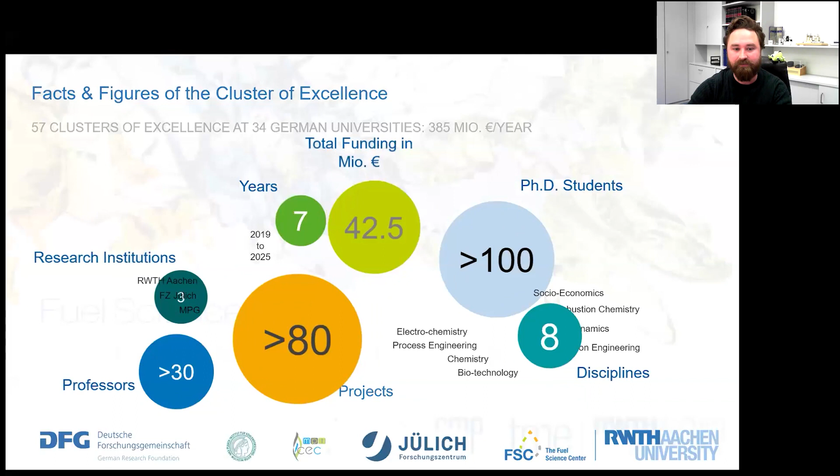With that, I want to show you how fuels based on renewable resources can, or in my opinion, have to contribute to a more sustainable mobility, and finally also to a CO2 neutral mobility with almost zero impact on the environment.

Our research here in Europe, and maybe that's also a little bit the picture for you, what motivates our work here is mostly given by the big social challenges we have in the whole world and the European Union. They defined some targets and some major challenges they want to address, and this is called the European Green Deal.

It should improve the well-being of all people in Europe. One of the biggest topics, of course, for the whole world, is becoming climate neutral in 2050. As I will show you, we think that sustainable fuels based on renewable resources are one important building block to reach that target.

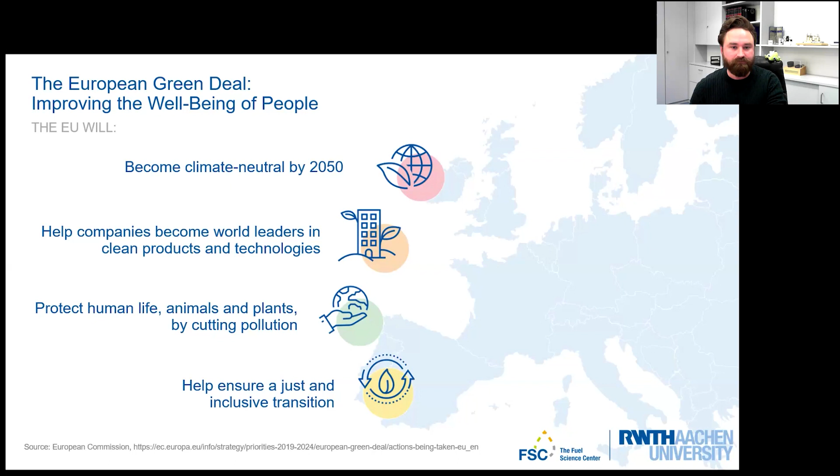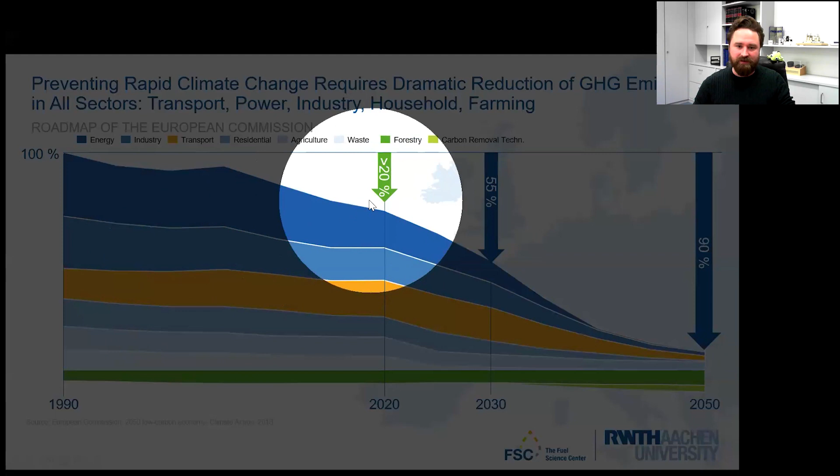If we look at greenhouse gas emissions, which are the driver of global warming and climate change, we see that in the last decades we have a good reduction of greenhouse gas emissions here in Europe. Here you see the CO2 emissions from 1990 to 2020 in Europe. And if you look at 2020, that looks quite good. We achieved the targets, or we overachieved even the targets for 2020.

But then you see that there is still a very massive decrease in greenhouse gas emissions necessary to reach CO2 or greenhouse gas neutrality in 2050. And neutrality means, of course, that we have to be greenhouse gas emission neutral. But that's not possible in all fields by 100%. So the target of the European Union is to reduce emissions by 90% and then have the last 10% compensated for by forestry, carbon capture and storage, and other carbon removal technologies. But still, we have to reduce greenhouse gas emissions by 90% related to 1990.

Currently, we are about a little bit more than 20%. In 2030, there is the intermediate goal of a reduction of 55%. Some sectors are quite on a good pathway. You see the upper bar, the dark blue one, which is the energy sector. They have a big contribution currently to the reduction measures, and also agriculture and waste is quite okay to some extent. But if you look at the orange bar, which is transport, this appears almost even to grow in 2020.

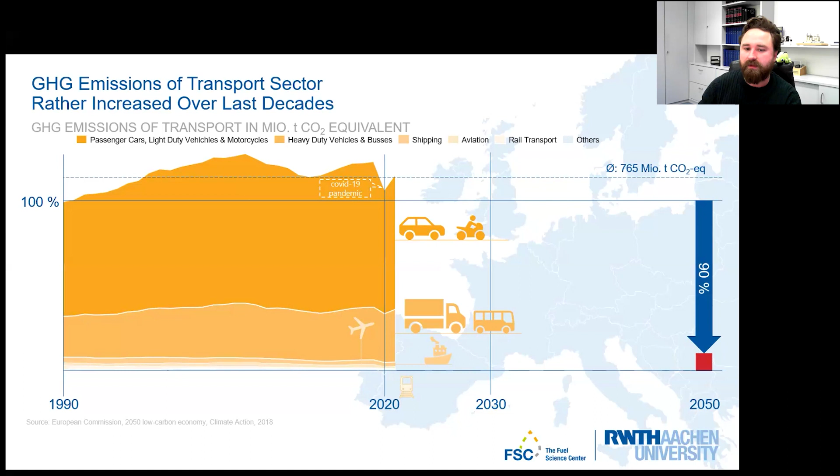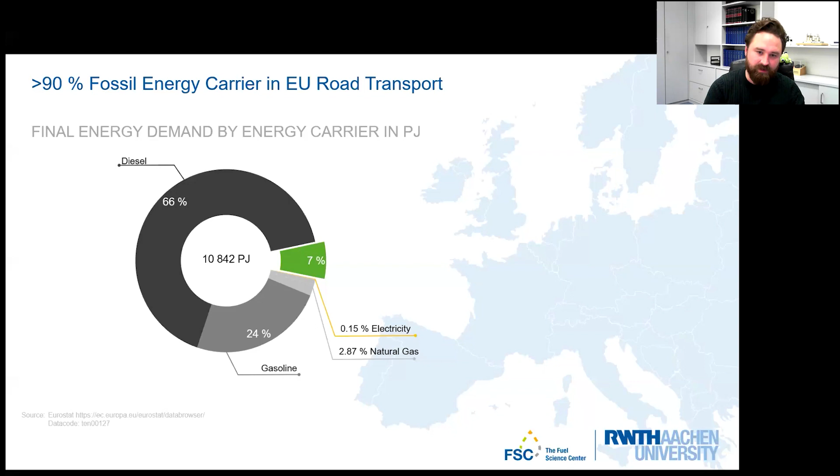But the current status tells a little bit different story. If you look at the energy carrier that I use today, this is more than 90% fossil based. So we have the conventional diesel fuel at 66%, and the conventional gasoline fuel with 1/4. And you see that the renewable share, particularly in transport, is very small, with 7%. And from that 7%, only 1.3% is electricity today. So it's a big way to exchange the whole vehicle fleet to get to 100% electricity share.

The current contribution to renewable energy carriers in transport is biodiesel. In Europe, we have the standard fuel at the gas station for diesel called B7, which means there is 7% biodiesel admixture in every diesel. And we have also up to 10% ethanol in our gasoline fuel here in Europe, called RON 95 E10. You get that at every gas station. Today, this is the only significant contribution for renewable resources in transport at all.

Then the next question is, where does this energy come from? Diesel and gasoline is imported. In Germany, 75% of all primary energy is imported, and more than 90% of the energy for transport is imported energy. And that won't change in the future.

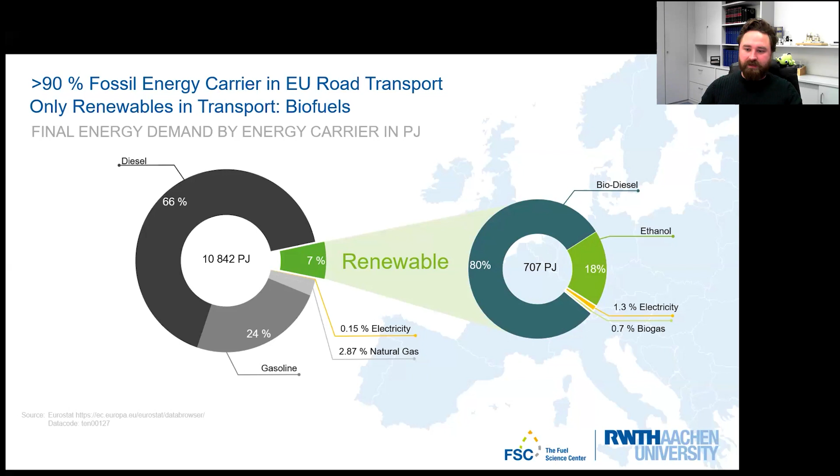So we still have to think about some options, how to, on a global perspective, import renewable energy. I will also show you a few solutions of what we think can be done to import renewable energy, particularly for transport. So in general, we have to get from a very established - if you say it positively - a fossil-based, static, parallel industry to a more adaptive and flexible future.

And this is what our vision here in the Fuel Science Center is: that we have a closed carbon cycle, but not only in terms of greenhouse gas emissions, also other sustainability parameters like pollutant emissions - so health impact, environmental impact - has to be near to zero. So we should have the smallest possible footprint in that.

Further, when it comes to renewable resources, we have way bigger fluctuation. I mean seasonal fluctuations, daily fluctuations with the sun, wind - that is a very fluctuating system. So our conversion systems that convert our resources into energy carriers, or into mobility, or into heat, they have to be adaptive and deal with that flexibility we have in the resources. So that's also part of our vision.

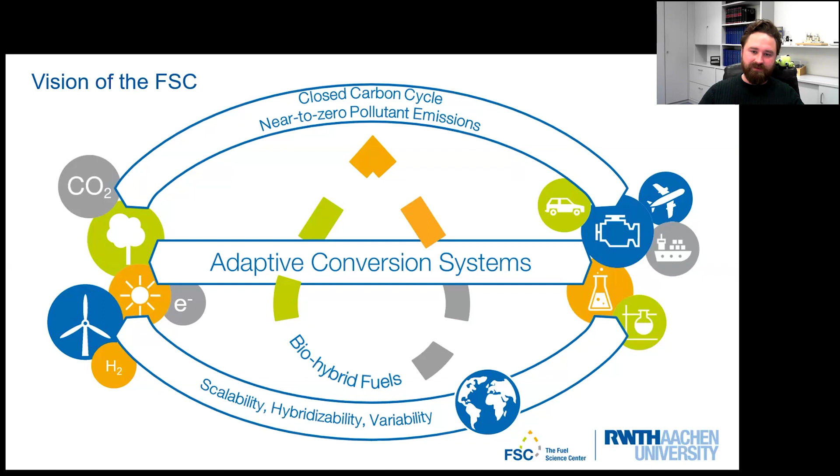What we established over the last almost two decades is called the fuel design process, which means we not only look into the synthesis of fuels, we also look in parallel at the usage of such fuels, and we want to find the overall optimum. So it's not sufficient to only have a very sustainable production - we also need a very sustainable usage of the fuels we are producing.

And to control and realize that, we have also a very important aspect, which is the sustainability analysis. So we have a very complex life cycle assessment around the other researchers, around all the projects, which are basically analyzing every single step in the whole value chain regarding greenhouse gas emissions, toxicity, social acceptance, economics. So a really comprehensive analysis in every step of the fuel processes we have.

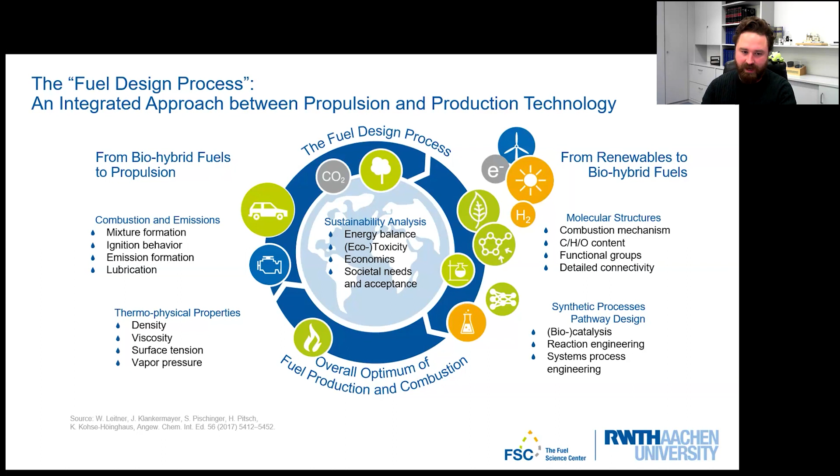And that leads to our structure. So the structure of our cluster really reaches from a molecular level - we have chemists that work really on an atomic level, how to create new molecules - up to the device level. Here we are developing engine concepts, reactor concepts. And then, as I mentioned before, we have a big team working on life cycle assessment to analyze the full system. And this is our very complex system.

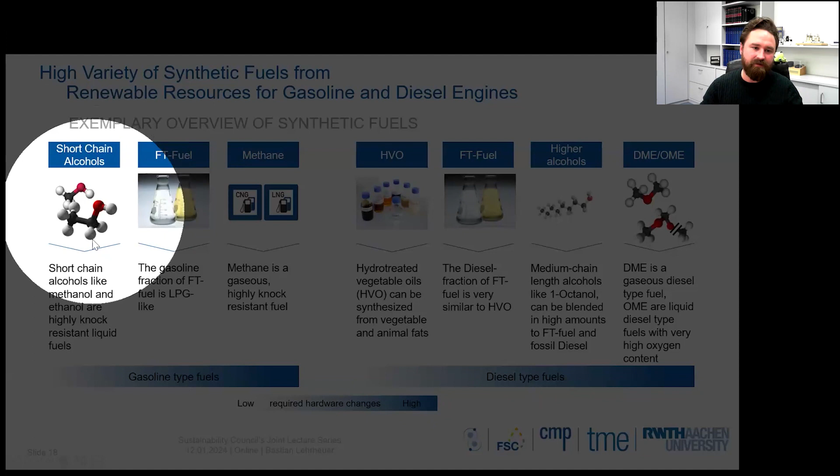For alternative fuels, there is also a whole bunch of different molecules available already. The first way to sort them out is to characterize them as gasoline type fuels or diesel type fuels, and there are multiple available - not only one e-fuel or one biofuel on the market, you can already find a whole bunch of different ones. For gasoline type fuels in general, you have more smaller molecules - short chain alcohols like ethanol and methanol. We also have a bunch of Fischer-Tropsch fuels, which I will show you later. You can also use gaseous fuels in gasoline engines.

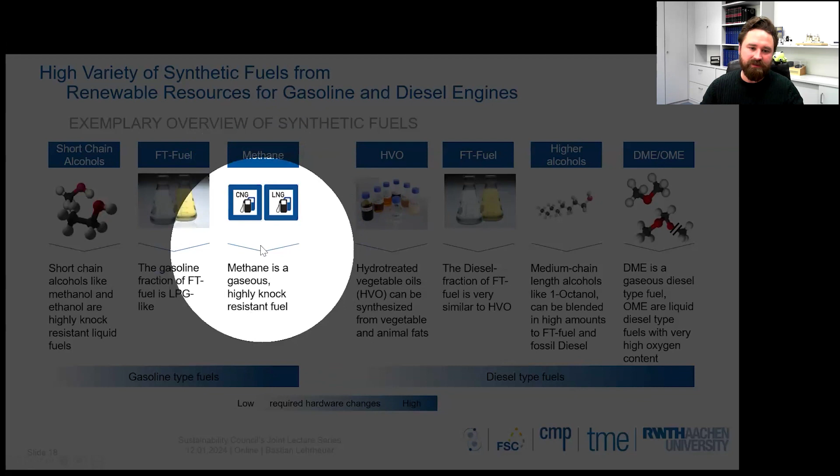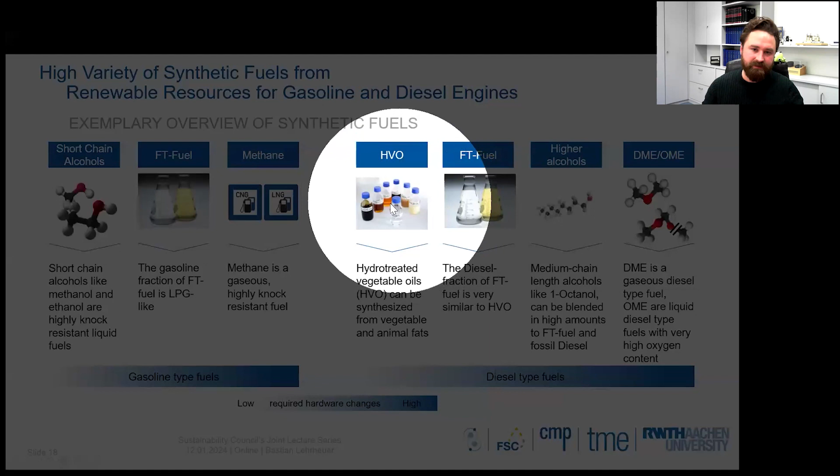On the diesel side, we see examples like HVO, hydrotreated vegetable oil. This can be made from waste - there's a Finnish company already producing a lot of HVO from used cooking oils. Of course you have to be very careful about the sustainability parameters here - is palm oil really sustainable? Are used cooking oils really sustainable? You always have to go all the way down to the base, to the first resource, to evaluate the real sustainability. But if you do that, this is already a very good diesel fuel you can use, and a lot of companies already allow HVO operation in their diesel engines.

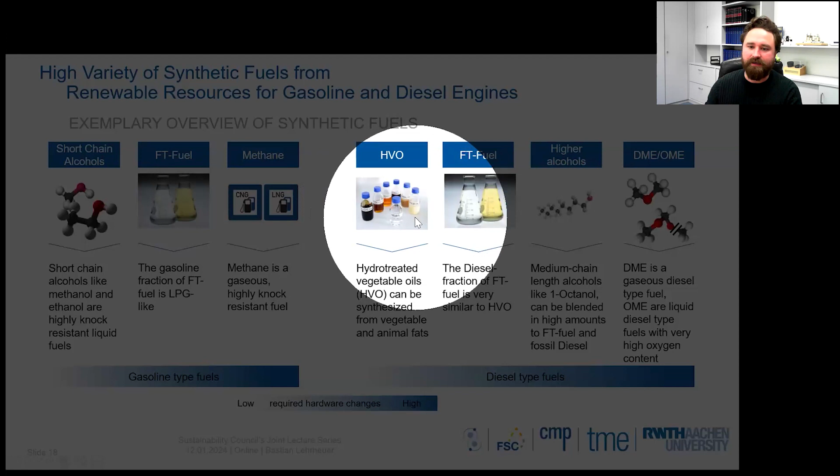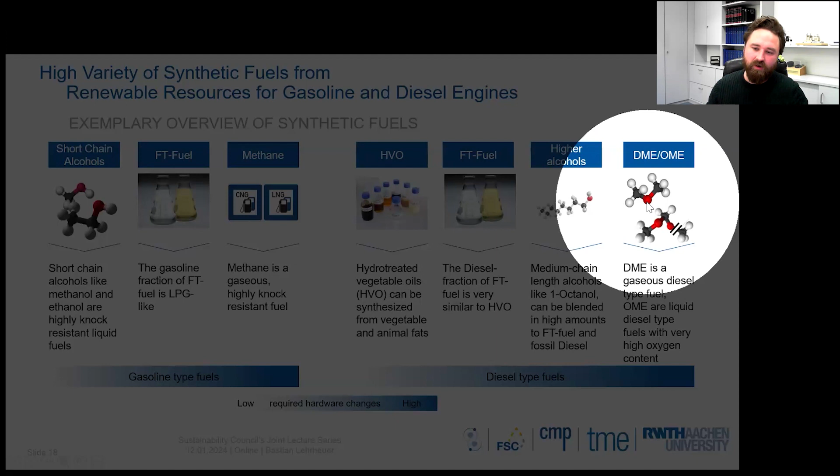Higher alcohols are also one option - I will show you one example later. And DME, this is a more exotic option, but there are already some vehicles out there. In the US, there was a truck fleet running on DME by Volvo. It's gaseous at ambient conditions, so it's a little different in fuel handling, but it's a valuable alternative to diesel fuel.

Also for such renewable fuels, there are a lot of different pathways. Some of them use already established processes - for example, if you have biomass, you can use gasification, and then you already have your synthetic gas. Synthetic gas means it's CO and hydrogen, carbon monoxide and hydrogen. And with synthetic gas you can create, particularly with Fischer-Tropsch, almost any hydrocarbon you want to have.

But for biofuels, the most prominent conversion system would be fermentation. Ethanol is one of the most common ones - Brazil, for example, produces a lot of ethanol from sugarcane. Here again, you have to be very careful if you talk about sustainable fuel and really check where your biomass comes from, not only in terms of greenhouse gas emissions. I heard that in Brazil they burn down the sugarcane fields twice a year, using fire to get rid of snails, insects, and snakes for the workers. That's not really sustainable and environmentally friendly, so you have to be careful there.

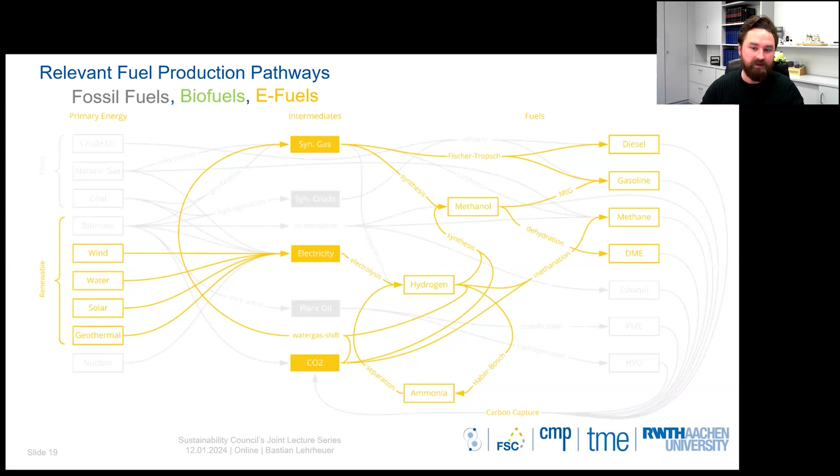Now if I have hydrogen and CO2, I can use water gas shift, which again produces my synthetic gas. And at this point, I'm in my already known processes and can produce almost any fuel I want. But of course, this is not as easy as fossil fuels - with every conversion step you need some energy and you have some losses. A combination of all of them is also possible, which makes the life cycle assessment not easy. You really have to dig into the resources and evaluate the sustainability for each step, for each element in your whole pathway.

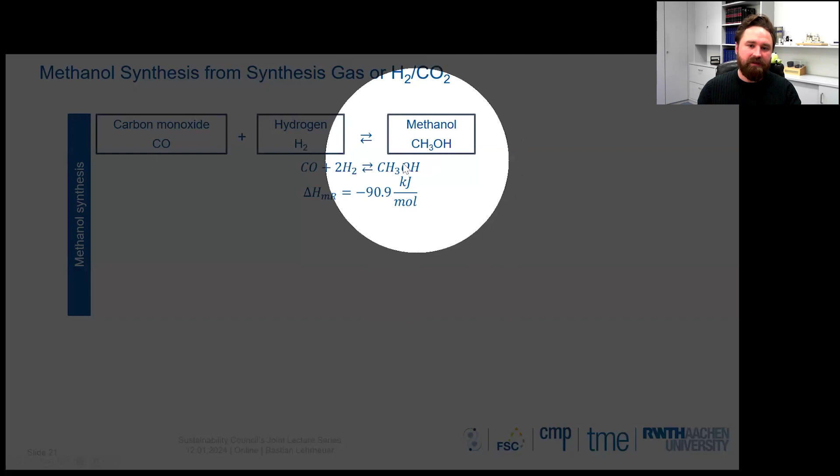One of my favorite fuels is methanol. Methanol is the first liquid fuel you can imagine. It's a one carbon molecule, a C1 molecule, and it's liquid. That makes it very easy to transport. So if you have methanol, that would be a perfect transport element for renewable energy. It has not that many conversion steps. If you have carbon monoxide and hydrogen, you can produce methanol directly, and then you would be able to transport renewable energy all over the planet.

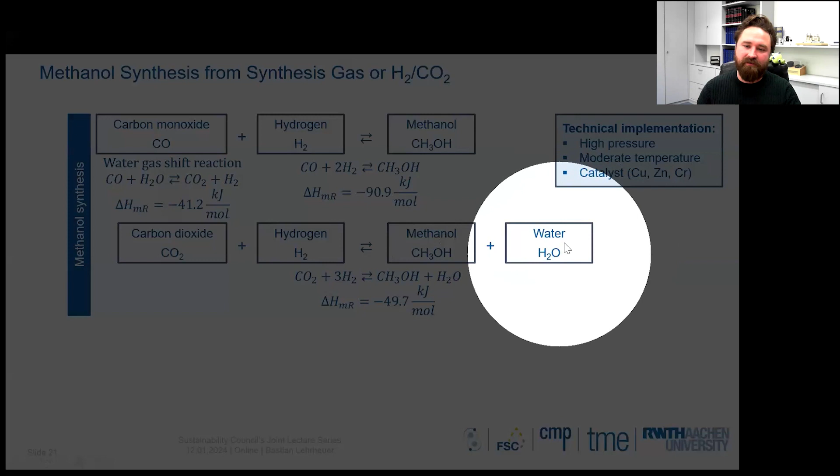Not only based on CO, you can also use CO2 directly. So that would be a direct conversion from carbon dioxide plus hydrogen to methanol. The interesting thing here is that water is also a product. If you think about locations in the world with a lot of renewable energy, like North Africa and South America, these are usually places with a lack of water, and you need water to produce your hydrogen. So in this process you get water as a product, which helps make the whole process more economical, and even possible in areas where you don't have that much water available.

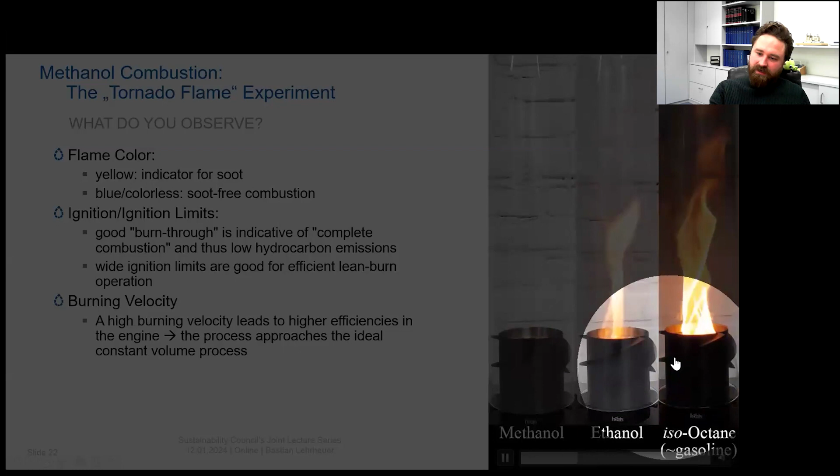Why is methanol one of my favorite fuels? This is a very simple experiment we performed. It's actually a little burner you can use on your porch as a source of warmth if it gets a bit cold at night. But you see here the difference between different fuels. On the right-hand side is isooctane, a surrogate for normal gasoline. You see a bright yellow flame and a lot of black soot on top. This is a very large molecule, and the combustion is not very clean — similar to what gasoline would look like in a flame.

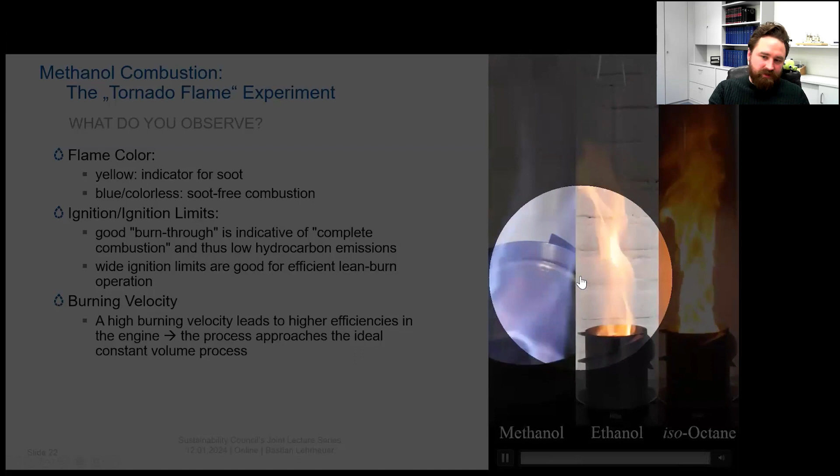Then with ethanol, you see almost no black soot on top. There's still a yellowish flame, but way cleaner than with isooctane. Now with methanol, you don't see anything, but it's already burning — there's no soot at all, so no yellow light, which is an indicator for soot. With no backlight, you can see this bluish flame. You only see methanol burning in the dark. It's a very, very clean combustion.

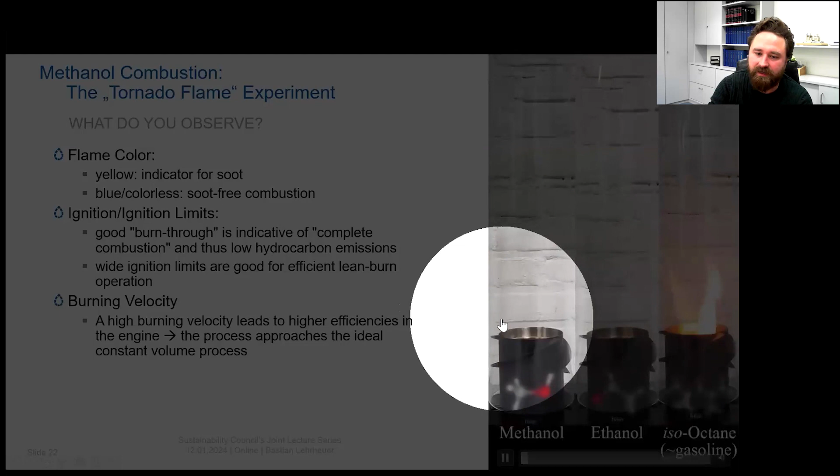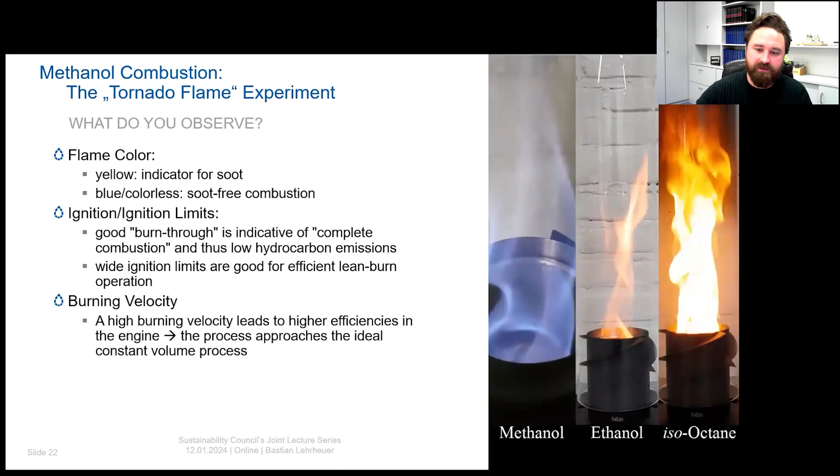Further, it's a very fast combustion, which makes it favorable in terms of efficiency for engines. It has maybe a little broader ignition limits, which can also be an advantage in engines, but makes it a bit more difficult to handle. So I don't see methanol, particularly in Europe, as a fuel you'd buy at a gas station. But for professional use cases like trucks or ships, methanol is one of the currently discussed alternative molecules as fuel for engines. There's a big market not only for mobility, but also for chemistry. We will see, but I'm very positive that methanol will play a major role as fuel and energy carrier in the future when it's made from renewables.

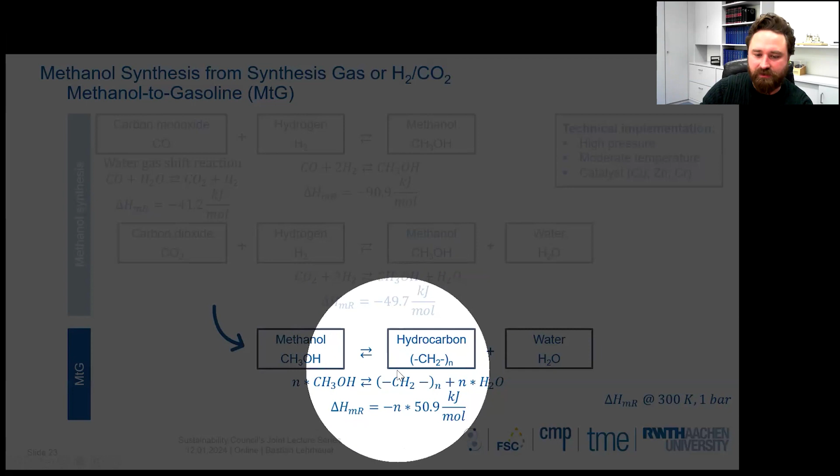Once you have methanol, there's a next step which is also very interesting, called methanol to gasoline. Here we take the methanol and run a catalytic process, which I won't describe in detail, but it's already available at quite a large scale to produce hydrocarbons similar to what we know from gasoline. That's why it's called methanol to gasoline — a one-step production of gasoline starting with methanol. Again, water comes out of this process, making it interesting for very dry areas.

What's so interesting about methanol to gasoline? First, it's already a well-known process, and there's currently one demo plant in Chile. This is a cooperation between Porsche from Germany, Siemens, and ExxonMobil, and they've built a plant that currently produces around 100,000 liters of methanol-to-gasoline fuel per year. They want to increase this up to 550 million liters per year. That might sound like a lot, but in terms of fuel amount and energy, this is almost nothing — I doubt you could power all the Porsches in Europe with this amount of fuel.

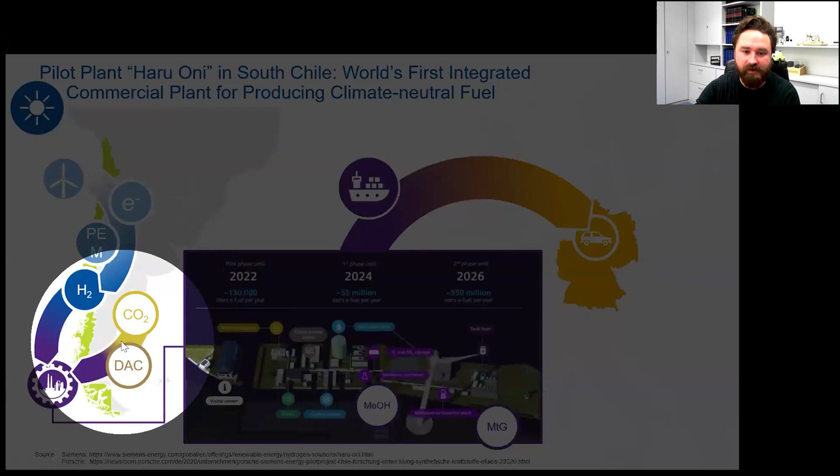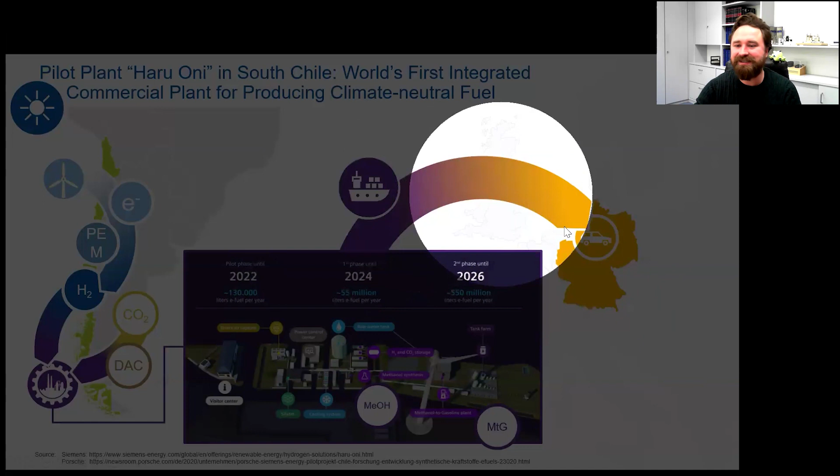To give you a comparison, there's a refinery in Qatar from Shell that converts 48 billion liters of natural gas per day. So they're producing 55 million liters of e-fuel per year, while the fossil ones produce 50 billion per day. So it's a first step, but far away from the large scale we might need in the future. But if we do this, we'd have a liquid energy carrier produced in South America that would be easy to transport with existing infrastructure. In my illustration I put Germany there, but you get the point — this is one option for a global market for renewable energy using liquid energy carriers.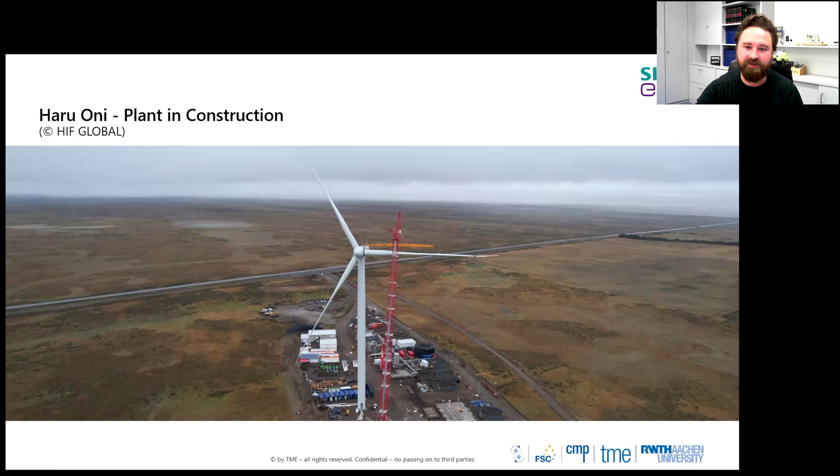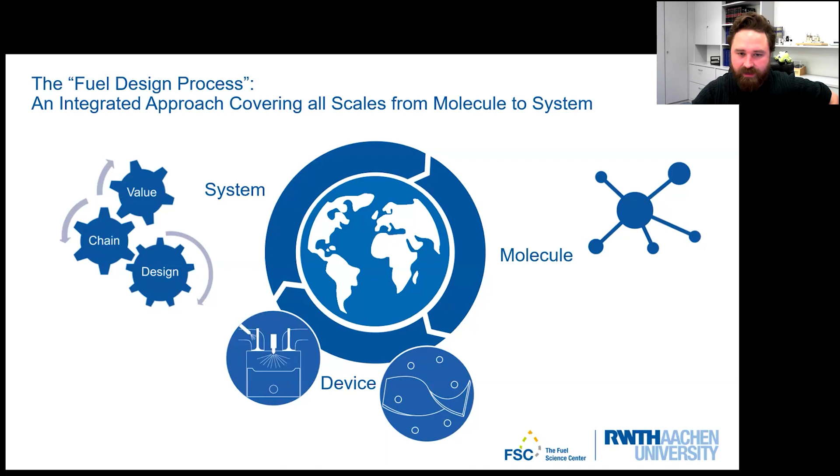Coming to diesel-like fuels, a little bit from our institute here, the TME, where we also investigate engines. I want to show you one example for a more applicable fuel. If it comes to a short-term application of a fuel, we have to have a fuel that is usable in the existing fleet, so it has to be compatible with the existing engines, with your car in your garage, and thereby we need it fast.

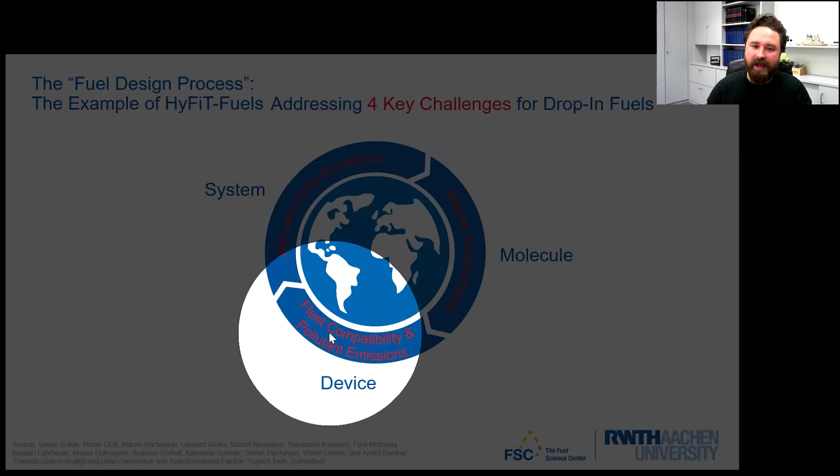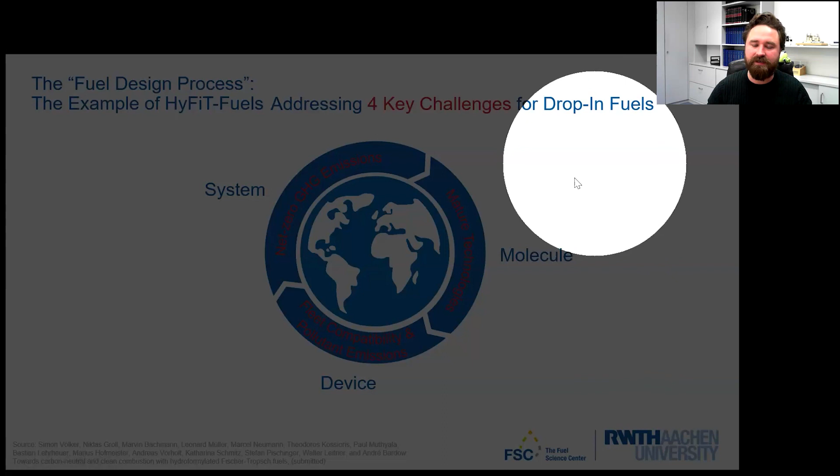So we need, for the production of such fuels, to rely on mature technologies that are available today. And of course, in total, we have to have greenhouse gas neutral fuels, which also don't have that much impact in terms of pollutant emissions. If we have that, we call those drop-in fuels - fuels that are able to get blended in or used in the existing fleet with no negative impact, and maybe even a positive one.

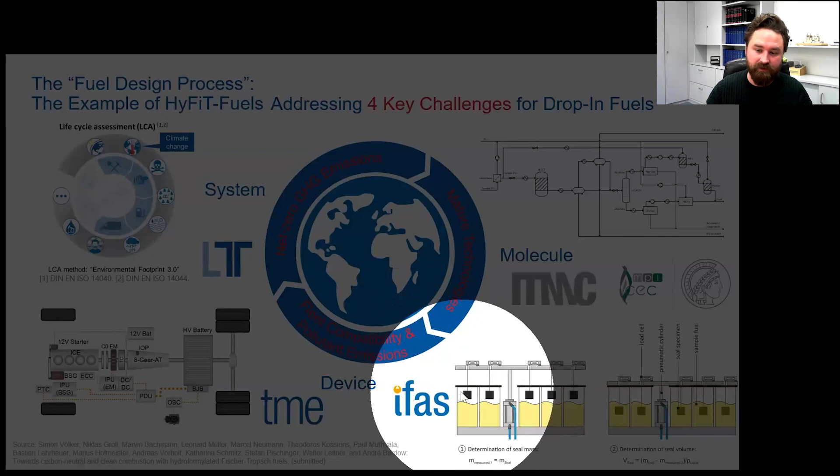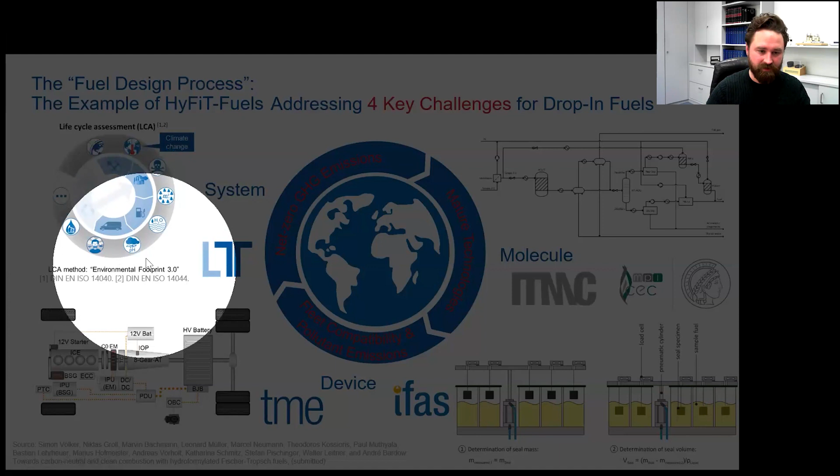This is a joint project with different institutes. I show you mainly what we have done at TME with the vehicle testing, but ITMC looked at the processes, IFAS did some research on material compatibility, and the Chair for Technical Thermodynamics did the life cycle assessment for this project. But as I said, I will now give you only a short insight into what we did with the vehicle testing. First, I want to explain what a HyFiT fuel is and how we get to that fuel.

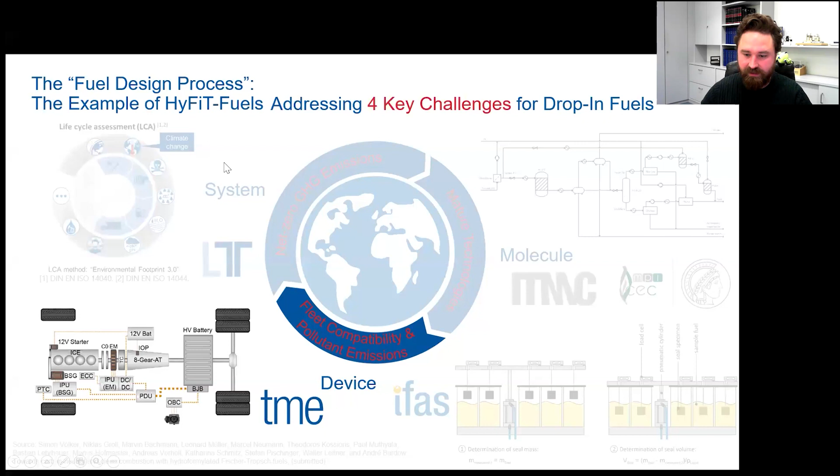We had a project where we found out that octanol is quite a nice and possibly sustainable biofuel. Octanol is an alcohol with 8 carbon atoms, so a long chain alcohol, and we figured out that it's quite a good diesel fuel. If you only blend it in, it can be used in an existing vehicle.

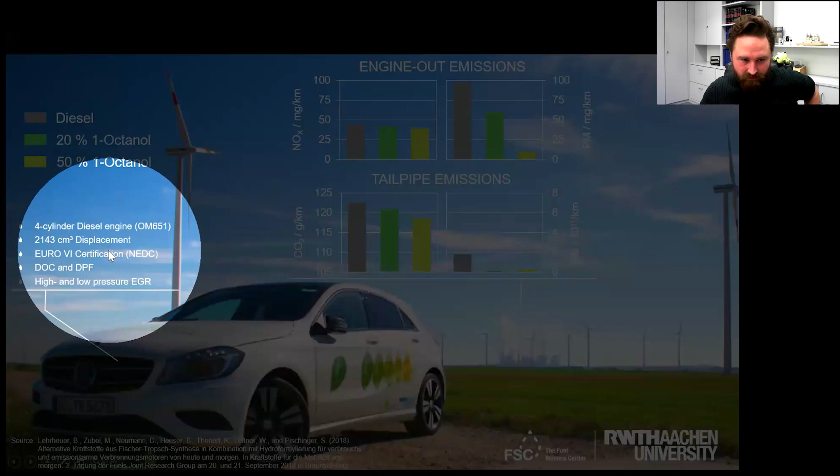So we have here a common passenger car in Germany, small for you possibly, with a 4-cylinder diesel engine in here. We didn't change anything except for the fuel. We tested it with 20% and 50% octanol, and the rest was still fossil diesel.

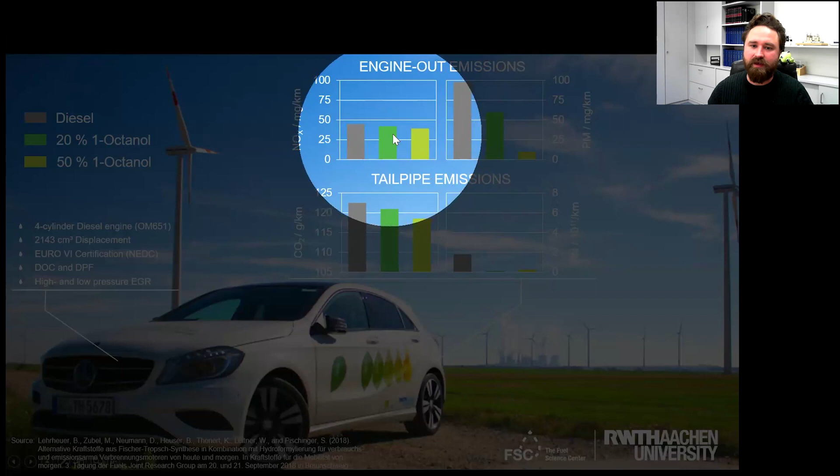You see here on these diagrams some emissions - NOx emissions, the nitrogen oxide emissions, which are very critical for diesel engines, and they are slightly decreasing. CO2 emissions are also improving a little bit, but the major advantage is on particulates, so soot emissions - PN is particulate number and PM is particulate mass. Already with 20% octanol, we see a significant reduction.

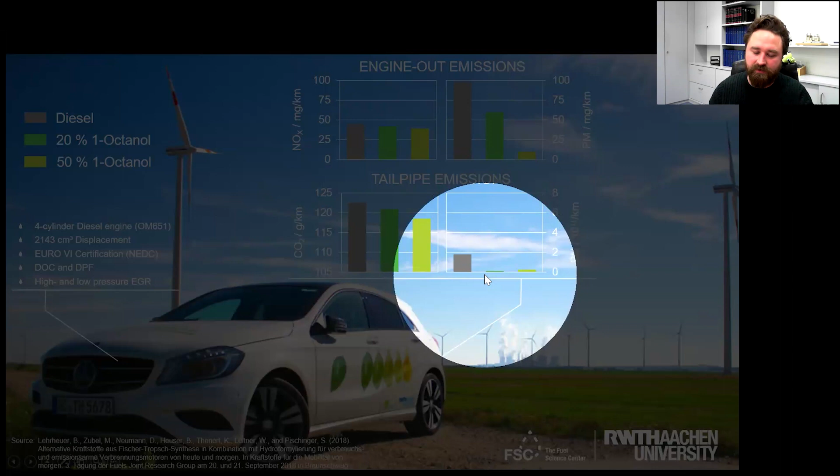This is not very surprising, because in an alcohol we have an oxygen molecule, and that oxygen molecule helps convert the hydrocarbon into CO2 and water. If you don't do that, you possibly create soot, but if you already have the oxygen in the molecule, it helps avoid soot production.

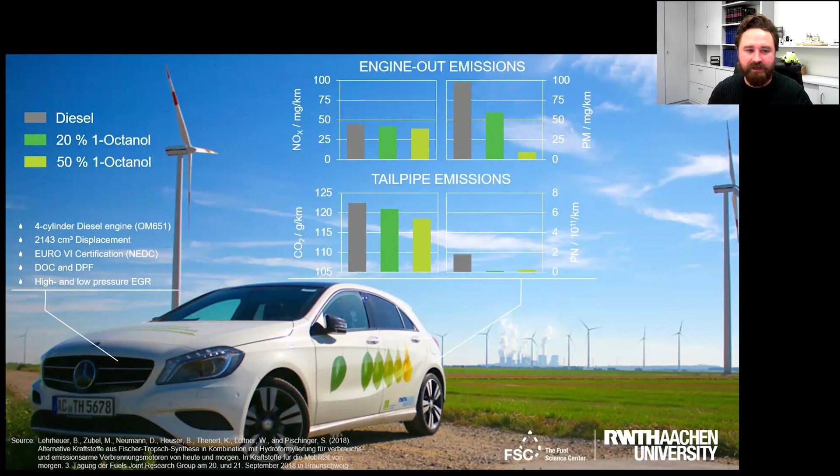So that was a starting point, and we thought we want to have a mixture of 20% octanol and diesel, because that's also very close to what is written in the legislation. The European legislation is called EN 590, and most of the parameters are already in line with EN 590 if we have a mixture of 20% octanol and 80% diesel.

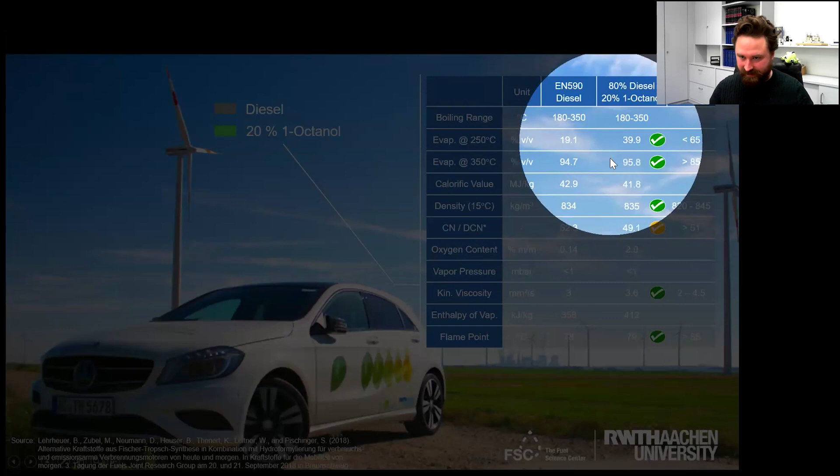Of course, we also don't want the 80% of diesel in there - we want to have a renewable fuel by 100%. That's why we went to the technical chemistry department and asked: can you imagine a process which produces about 75% alkanes, which is diesel-like, and about 25% longer alcohols?

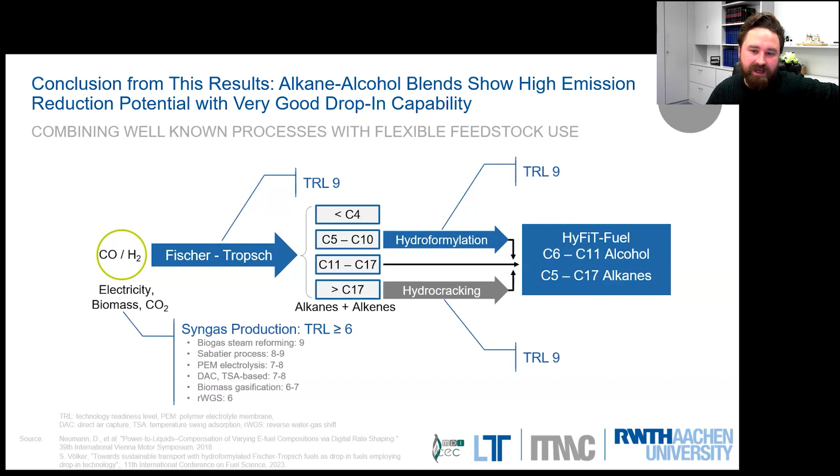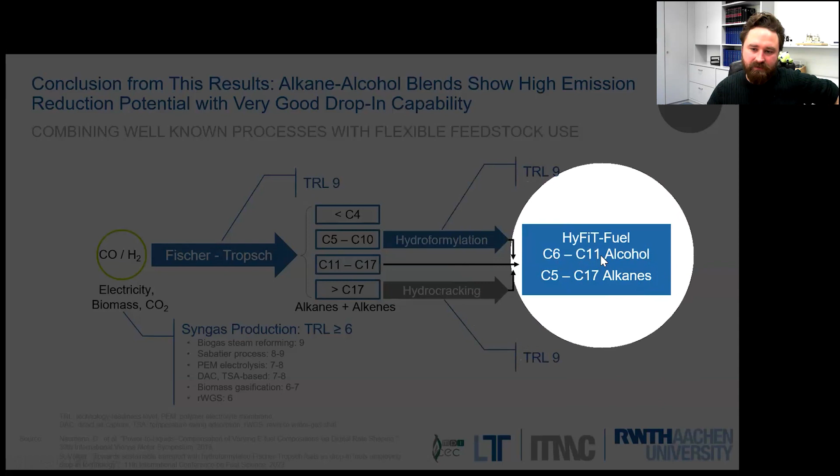And they didn't have to think that much. They found that a combination of already known processes, namely the Fischer-Tropsch process and hydroformylation, can lead to our desired mixture of alcohols and alkanes. This is also where the name comes from - we called it HyFiT fuel, so hydroformylation, Hy, and FiT - the HyFiT fuels.

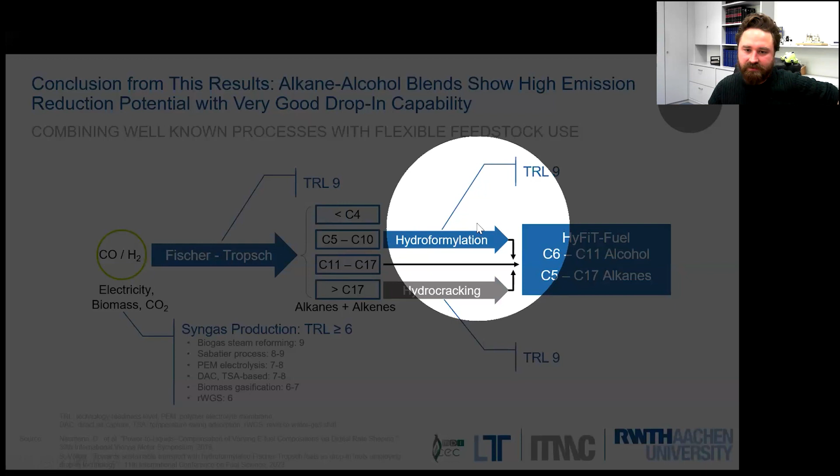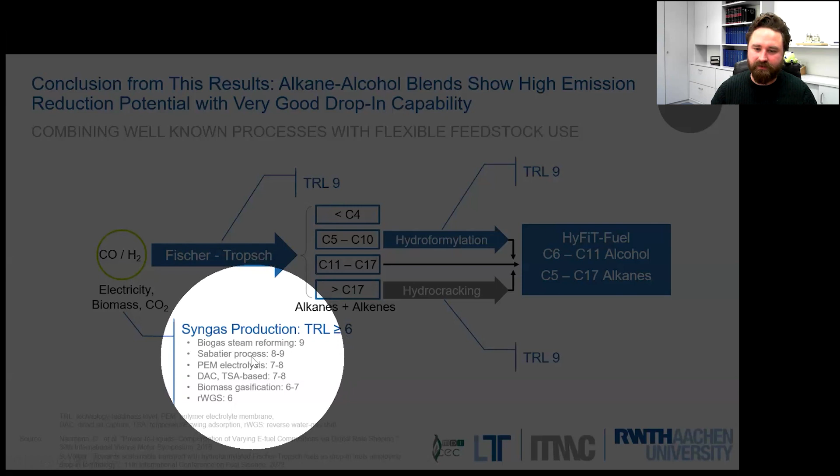Those two processes are on a very high technology readiness level, basically established for almost 100 years. Of course, the first step, the synthetic gas, also has to be renewable, and that is where development is currently ongoing. But any sector needs synthetic gas - the chemical sector needs it too - and that's why it's very sure there will be a source for sustainable synthetic gas in the near future.

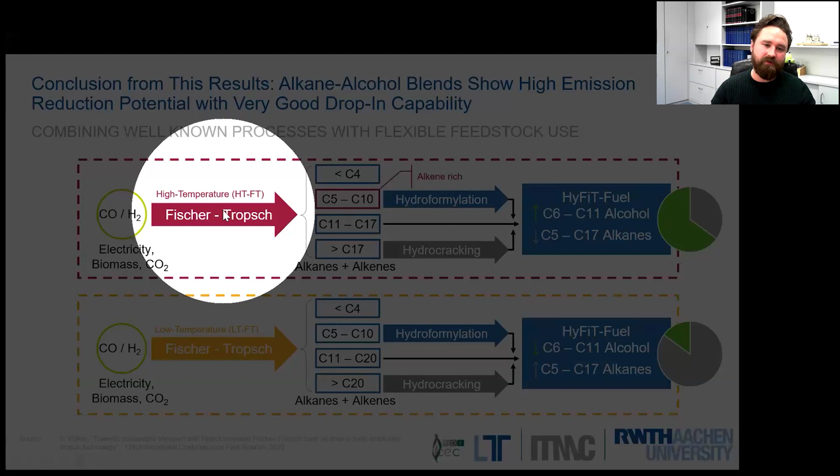The Fischer-Tropsch process is very interesting - it's very flexible, and you can adjust it by temperature. A high temperature Fischer-Tropsch process produces particularly C5 to C10 alkenes, which then convert into the alcohols we like, up to about 65%. A low temperature Fischer-Tropsch gives a lower share of alcohols, and this gives us a little flexibility in fuel design, so we can check in our engine which alcohol content is sufficient or desirable.

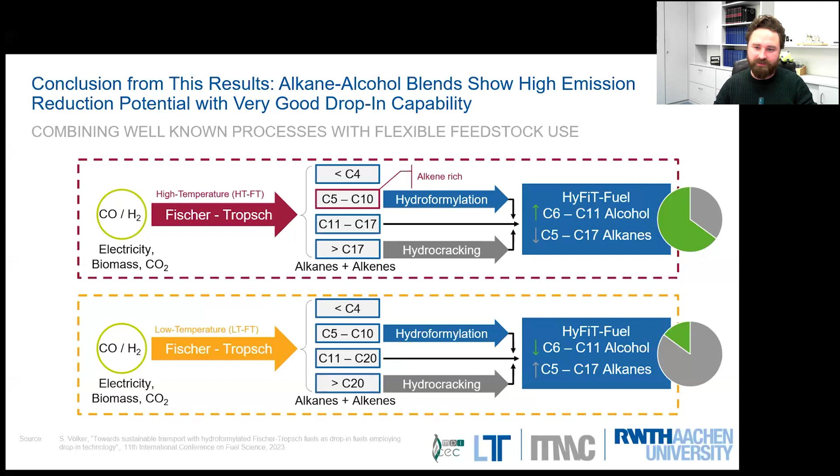So the first thing we checked for different alcohol contents was the compatibility of the fuel. And we did that for some parameters. You see here some examples.

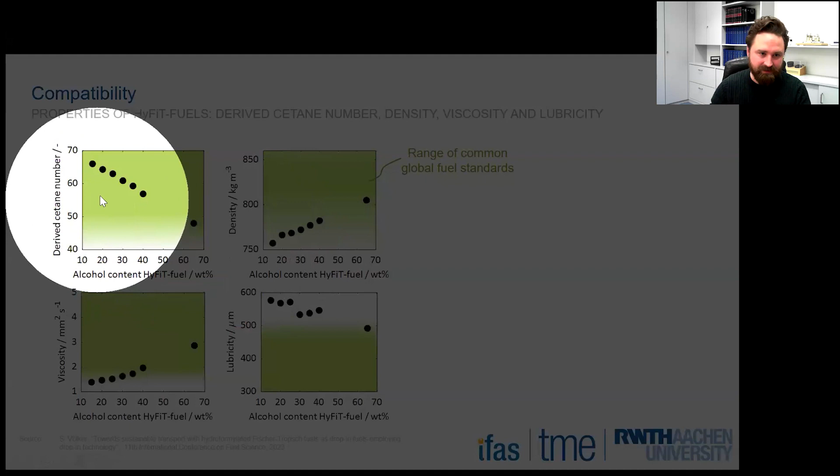Cetane number is the indicator for the ignitability. Diesel fuel is somewhere around 52. Then you have here density, viscosity, and lubricity.

You see here in the green one, we have the common global fuel standards. So we didn't focus on the EN 590, the German one, or the European one. We checked different legislations, that's why we don't have a line. We thought it should be globally applicable.

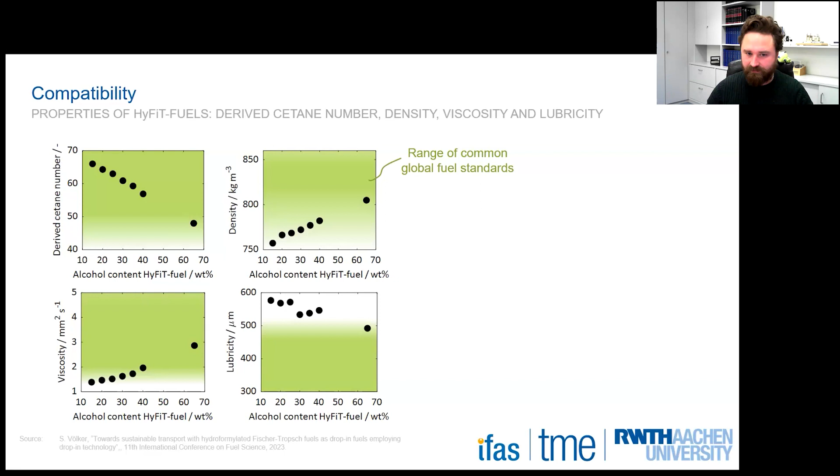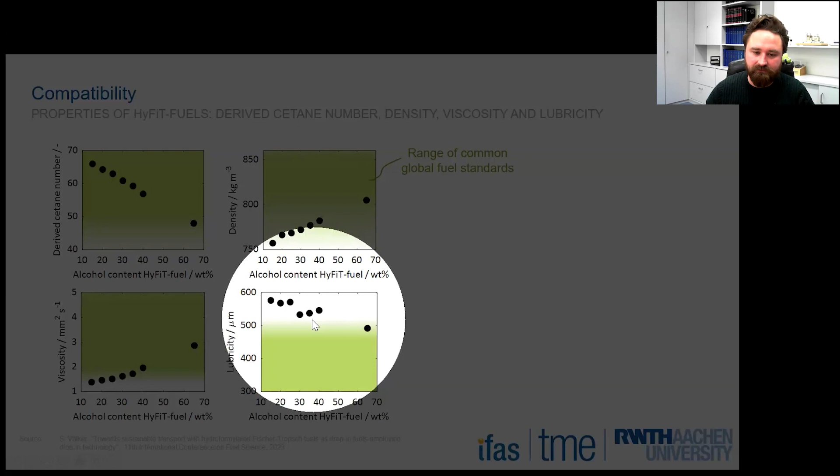You see here, the only parameter that is a little bit out of scope is the lubricity, which is quite easy to handle. To compensate that, we added some additive, only a small ppm portion, to get that down. Of course, we also checked some overlap with other parameters, but this is quite a common additive and it doesn't impact other parameters.

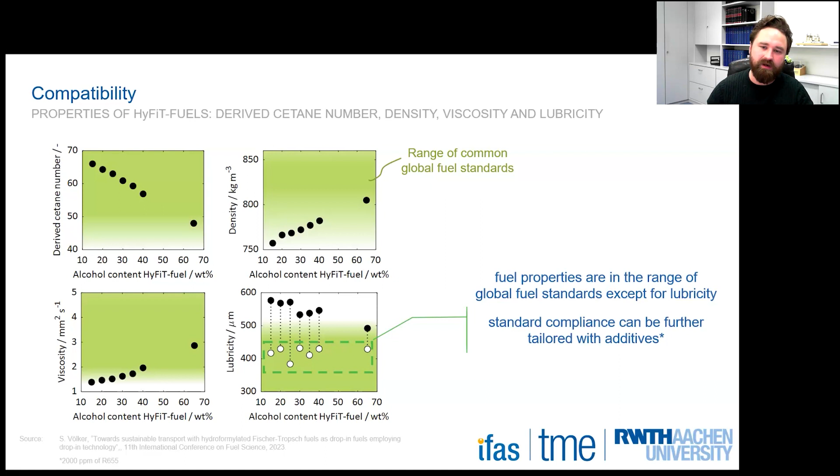Then in the next step, we chose two reasonable boundaries, 20% and 40% alcohol content, to be tested in our test vehicle. We mixed them together in a certain amount and put it into this light commercial vehicle. It's a 3.3 ton van.

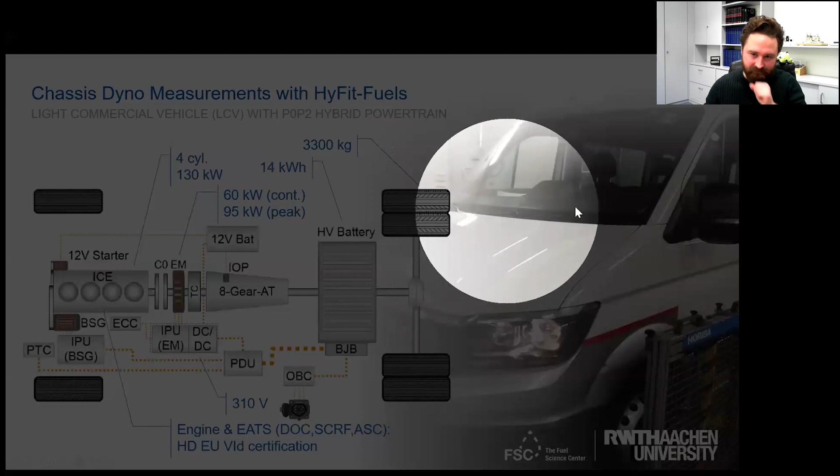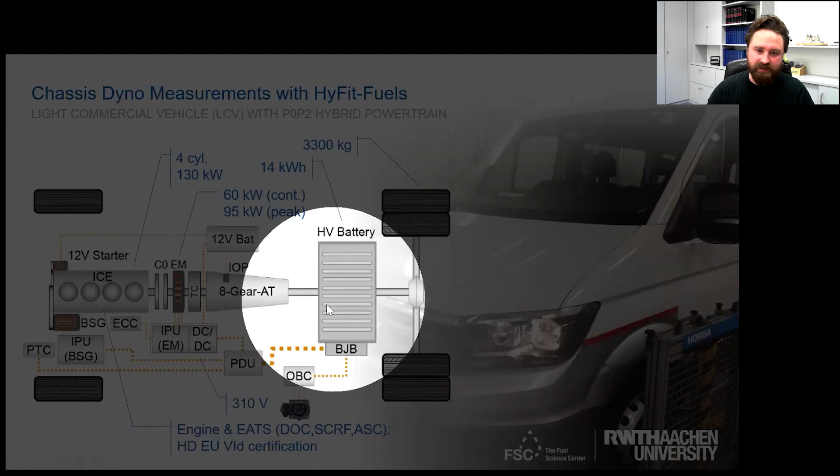And it's a series production engine. So we have here a four-cylinder 130 kilowatt diesel engine, which is already found on the road. It has certification under the current European legislation, and you can buy that engine and drive it on the road. What's a little bit special is that we set it up as a hybrid powertrain, but that is not important for our tests.

We wanted to test the performance of the fuel, and we did that in what's called the World Harmonized Light Vehicles Test Cycle, a standard that is similar all over the world. It's a test procedure where you drive with such a vehicle and measure the emissions, and at the end you have to meet some limits of the legislation.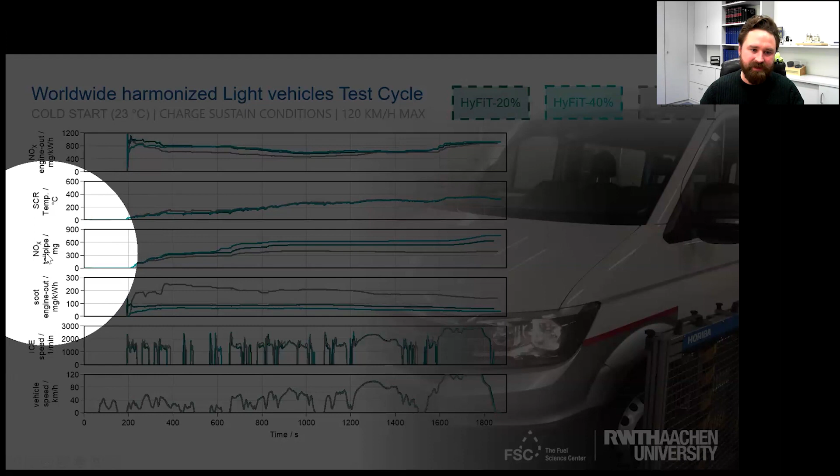You see here different emissions. The upper one is called NOx engine out, that's what's coming out of the engine. Then every vehicle also has an exhaust after treatment system that converts the engine out emissions and reduces them, like an SCR catalyst reducing NOx emissions. And then at the end, you have tailpipe emissions coming out of the vehicle.

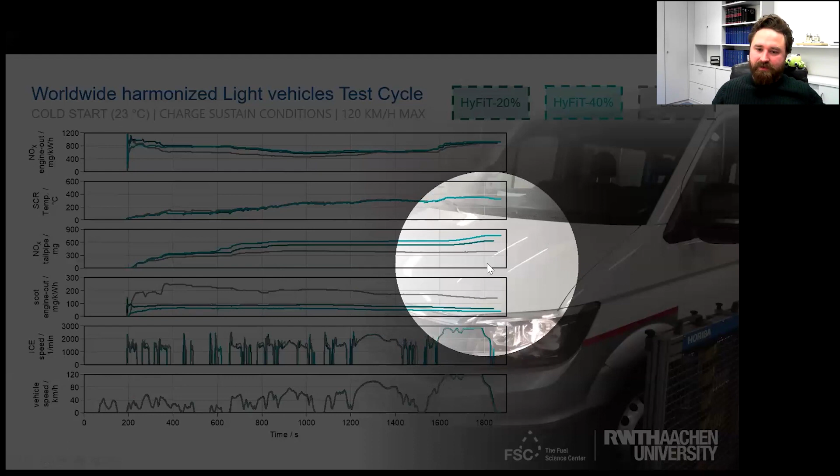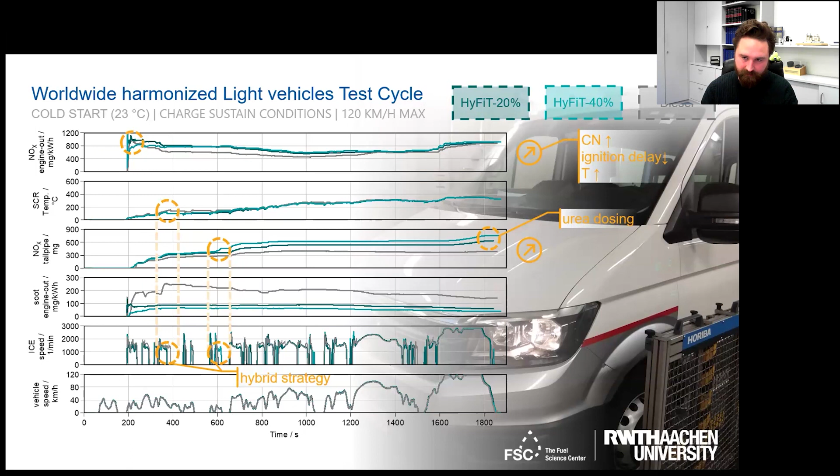You also see here the soot emissions. What's first a little bit disappointing is that the NOx emissions are increasing. There are some reasons why that's the case, I won't go into much detail here. That's mainly due to the calibration, and we didn't touch the calibration at all. In a real application, you could even do some software changes, but we didn't change anything. And that leads at some points to an increase in NOx emissions.

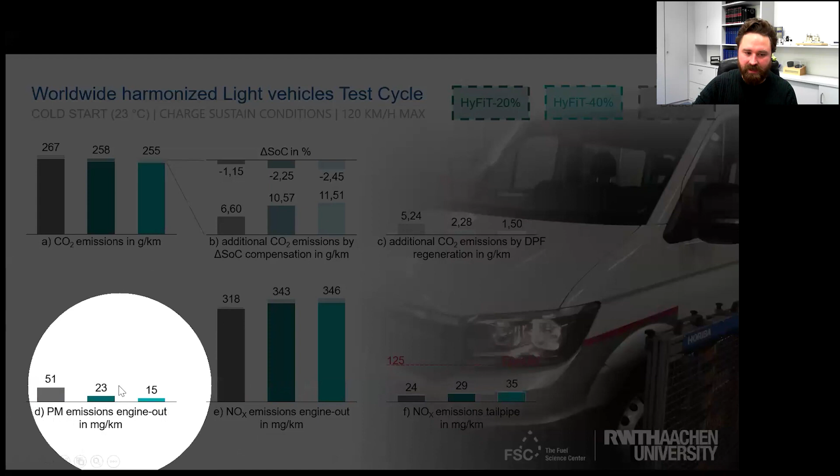But the very positive point is that the soot emissions are decreased, as expected, quite significantly. And why can I say significantly? When you accumulate all the emissions over the test cycle, particularly for NOx emissions, we are in all cases way below the limits. So that doesn't have a significant negative impact. The soot emissions are reduced by more than 50% here, which is a bigger advantage than drawback.

And the conclusion of that is that with our fuel, which is potentially 100% renewable, we can use it in an existing vehicle. We don't have to change anything. We don't have any emission limits that are exceeded, and we even have some advantages in emissions.

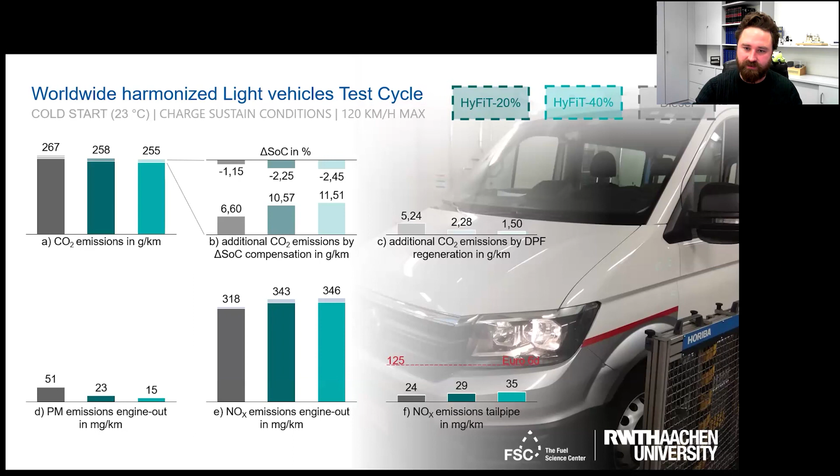So we think with that work, we found a very interesting fuel candidate which can be used as a drop-in fuel. If you are interested in more details, there's a paper currently under review. Unfortunately, it's not yet published, but if you have any questions, of course you can also contact me, and I can go into more detail here.

Then for the last few minutes, I want to talk about two more aspects. If people discuss e-fuels, there are always two things they come up with why e-fuels are not possible. The first one is they say they are awfully inefficient. I mean, awful is not a really good quantification, and you also have to think about which boundaries you look at.

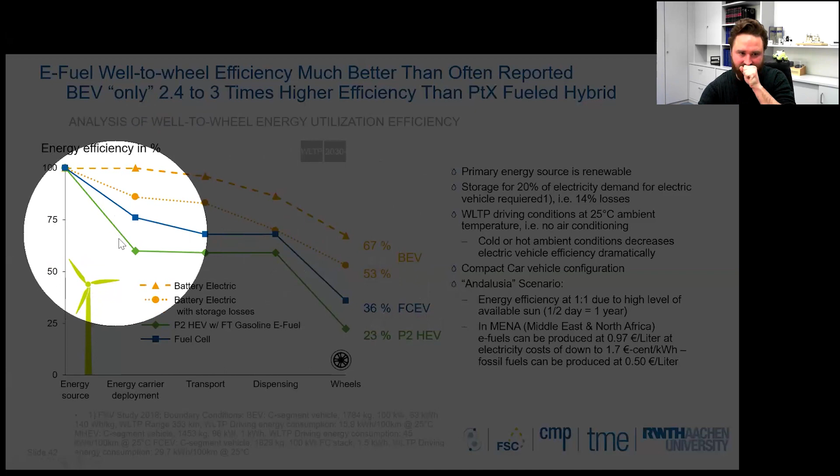In this study, you see here energy efficiency from the energy source to the wheel. This includes the conversion of the energy down to the propulsion, so that's called well-to-wheel efficiency, and this is already quite a complete way to look at this. A little bit further would be cradle to grave, which also includes the production and recycling of the vehicles, and after that there would be life cycle for the vehicles. But well-to-wheel already shows my point.

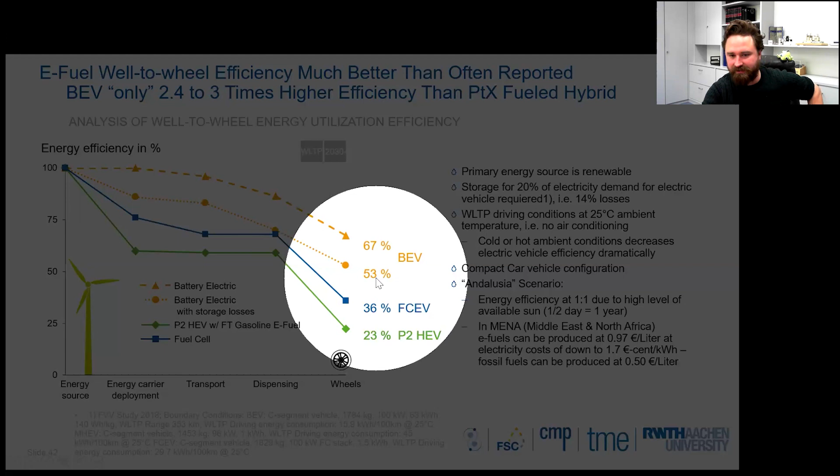And of course, every renewable electricity you can use directly should be used directly. So battery electric vehicles are very important because they are more efficient. But they are not 10 times more efficient than engines. They are about 3 times more efficient than a modern state-of-the-art combustion engine vehicle, as was pointed out by this study.

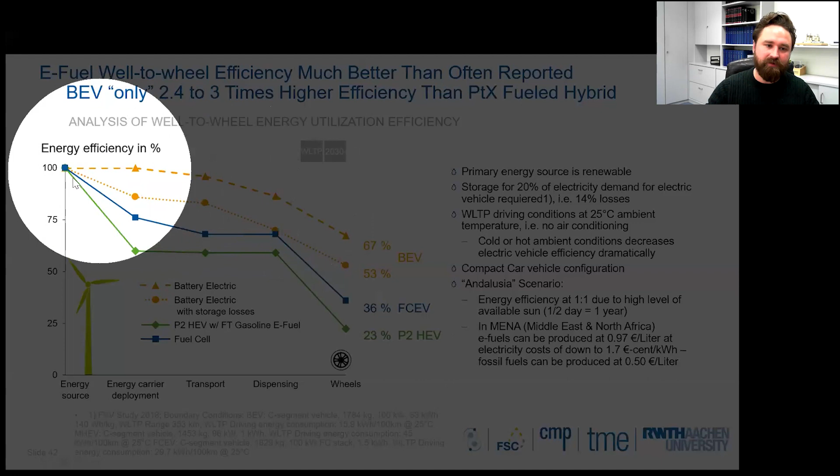So a factor of 3 in efficiency, and that's the conclusion here: if you have electricity and you can use it directly, do it, because it's more efficient.

But now the question is, where does my energy source come from? As soon as I try to get renewable energy from other continents, this is where renewable energy is more efficient. In North Africa, solar panels can produce about 3-4 times more electricity per day than in Germany, for example. So you have to take into account how much electricity can be produced per solar panel, per windmill, and this is way more efficient if you go to North Africa, South America, or anywhere else in the world.

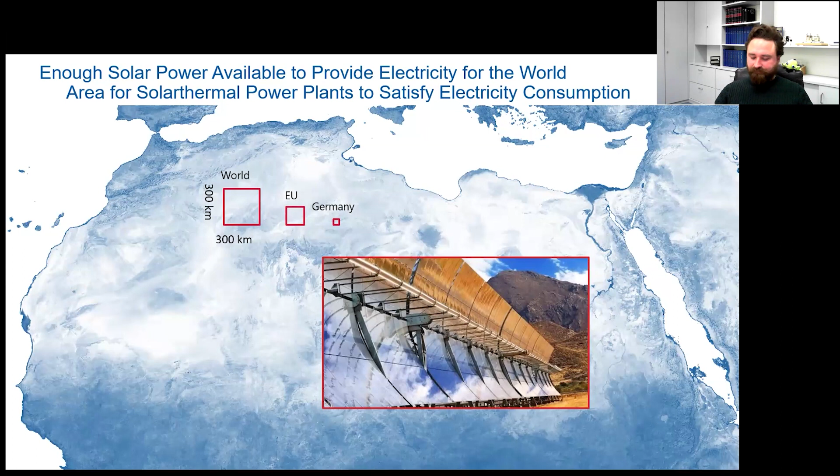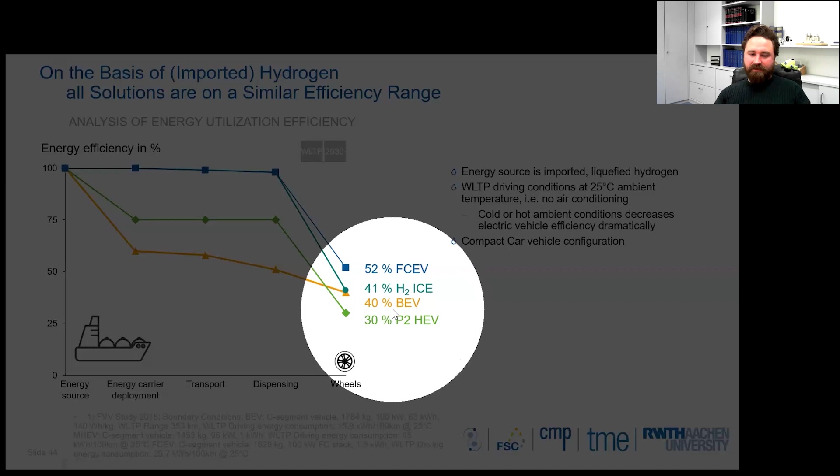And then you have to get this renewable energy back to Europe or Germany. If you consider the transport into this well-to-wheel calculation, you see that you have to convert the electricity at least to hydrogen, and then convert the hydrogen back to electricity. You have two times a loss in efficiency here, and this is illustrated here. So to get your renewable energy to Europe, you have to convert it into hydrogen and then back into electricity until you reach the electric vehicle. Still, there are advantages for battery electric vehicles, yes, but now they are in the same ballpark, and it's way easier to transport liquid energy carriers than hydrogen.

So what I try to say here is efficiency is important, of course, but it shouldn't be the only parameter to evaluate if something is good or bad. Particularly on a larger scale and in a global perspective, other options should be on the table and not ruled out only because of efficiency.

The second discussion is always about costs. It's way too expensive. The costs for e-fuels highly depend on hydrogen costs, and the hydrogen costs again depend on where the hydrogen is produced and how.

This diagram is a little bit complicated, and I won't go into detail here, but you see the costs for hydrogen on the x-axis, and then the fuel costs for some fuels, MeOH, that's methanol - so the yellow line would be methanol. The prices here are the prices in Europe, not even currently. Currently the price in Europe is already at about 2 euros here, including tax.

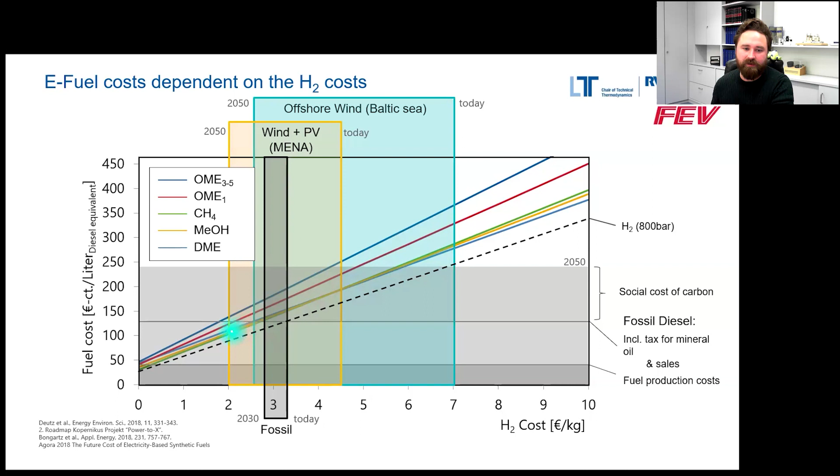But the point is, you see the break-even point between the costs of the fuel and the fossil ones is shifting in the next years, and you can reach quite cheap points if you produce your hydrogen very cheaply. There was a study calculating how much this gasoline I showed you earlier from Chile would cost today, and they came up with a price of €1.30 per liter gasoline, and that's actually without tax. But that's cheaper than gasoline costs with tax today. So with a tax, you can also play around.

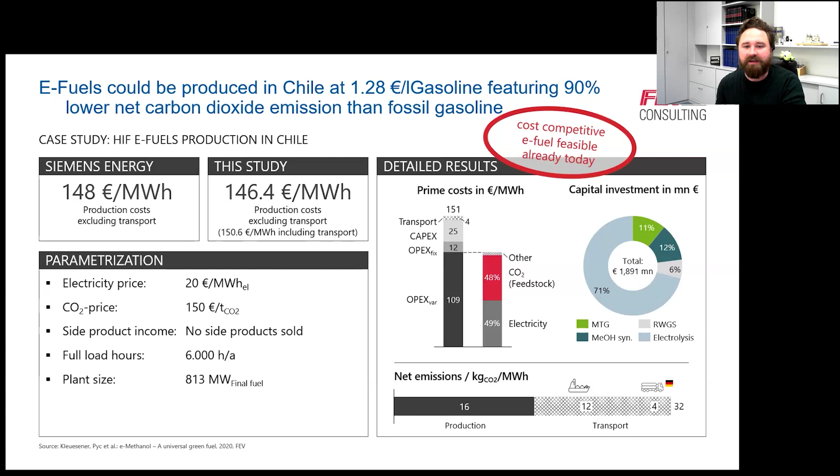But some people claim that e-fuels cost like €5 per liter. A lot of studies show that we are already in an area of €1, €1.30 per liter gasoline fuel, and this is, I think, particularly if you consider it as a renewable fuel, quite competitive and possible to put such a fuel on the market. So I state that they are already cost competitive, that you shouldn't look at efficiency only, and I also state that we need these fuels to reach sustainable mobility.